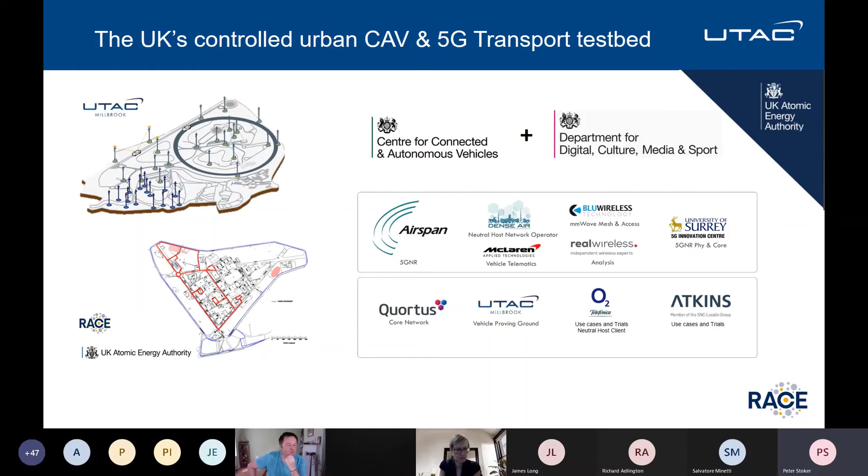If I move on to next slide. So this is an overview of our connectivity that we have at the UTAC Millbrook location. So for those interested in connectivity, devices, services, etc., we have around 59 masts with around 100 base stations. We operate private networks in 4G and 5G standalone, in millimeter wave, in DSRC. We have high definition CCTV, lots of fibre and power, and very accurate locations, object to object, anywhere on the site. So it's a very highly intensive, hyperdense, small cell network.

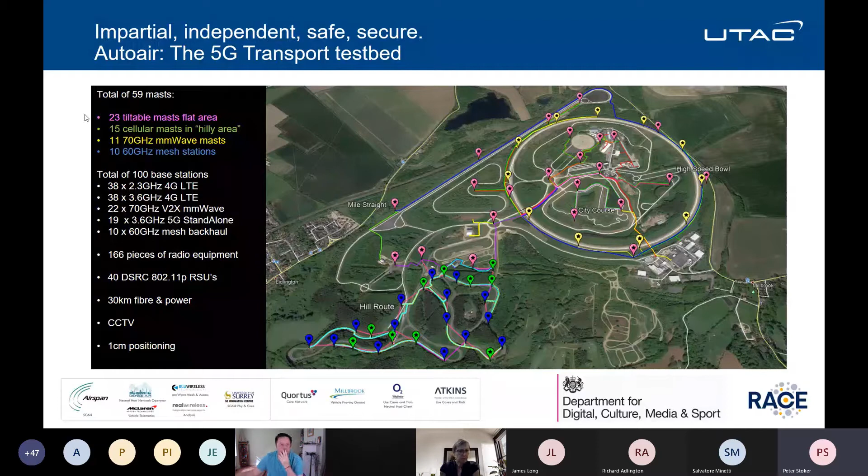You have your own SIM cards, so you can come along and test, and as we say, fail in private. The ability of a private network is we can turn it on and off, up and down, and so on. The Culham location, which is located just by Abingdon in Oxfordshire, is the home of the UK Atomic Energy Authority. They have a division called RACE, which is Remote Applications in Challenging Environments. And so RACE are interested in robots, well, autonomous vehicles and challenging environments, the public roads, hence the idea for the collaboration. But also we have access between us to the 200-acre site that's located at Culham with its roads and everything else I'll come to.

So the original proposition of our joint project was to offer test services to the industry, including new facilities, a simulation suite. What was innovative, it's a clear pathway to on-road operation, as we just heard from James. It's open to everybody. And because we're independent and impartial, we're not a threat to customers' IP or any compromise on that. We test vehicles, components, systems, and now services. We have lots of space, lots of tracks, and lots of endless scenarios and use cases. And we're open to startups, SMEs, OEMs and consortia. And indeed, from the last SME program you saw on the video, we had quite a few of that cohort actually testing with us in both locations.

What have we been up to? We've been doing a lot of work in terms of networks. We've been neutral hosting. We've been sending a lot of high-speed data backwards and forwards and overloading cellular networks. We've run some really interesting use cases in healthcare, in high-speed rail. We do live data broadcasts between vehicles. We do video calls at 100 miles an hour and remote vehicle driving. The sort of high-speed data we can pursue is around about 1.6 to 3 gigabits per second at 160 miles an hour, which is a high-speed rail use case. We're doing lots of work on CAV testing for AI development in ADAS, in safety drivers, different vehicle types. And we've seen lots of different people, startups, SMEs, OEMs, mobile operators, infrastructure providers, regulators, drones, and even local authorities.

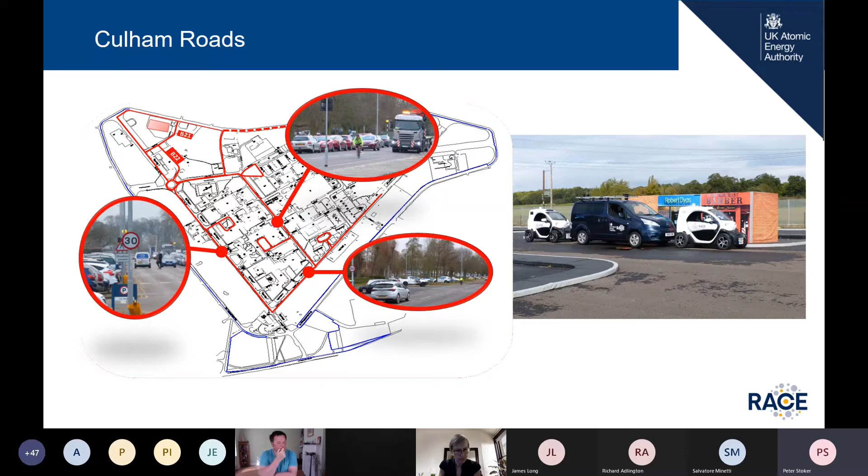So more a semi-controlled site, but with people and vehicles and obstacles and road features. So here you can see a lot of signage, a lot of different vehicle types. We have a lot of junction types as well, and very flexible facilities that we can recreate road environments with sort of temporary paving and curbs and things like this.

Active safety. If you're working in this area, we have targets available. So we have cyclists, motorcyclists, pedestrians. We've got road signs, street lights, very accurate positioning, and a lot of good high-speed multi-channel data logging as well if you're dealing in this area. And particularly with signs, we don't just show nice clear road signs, obstructed signs, illegible signs, spoofed signs, whatever we need to do.

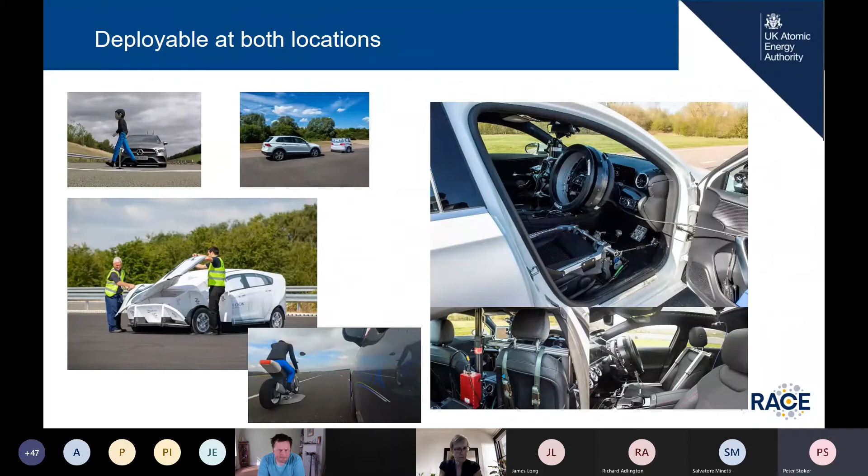And also lots of different vehicles. Again, if you're working in collision or you're working in collision protection or AI, then we do offer the ability to look at robot controlled vehicles as well as steering and pedal robots to operate your vehicle under test.

As well as a physical environment, we have a virtual environment. We have a very accurate digital environment at Millbrook tracks, resolutions around 1 millimeter in Z. And on the bottom there, you can see left is virtual, right hand is real. So we have most of our tracks covered. We have a driver in the loop simulator. We have a vehicle in the loop simulator as well.

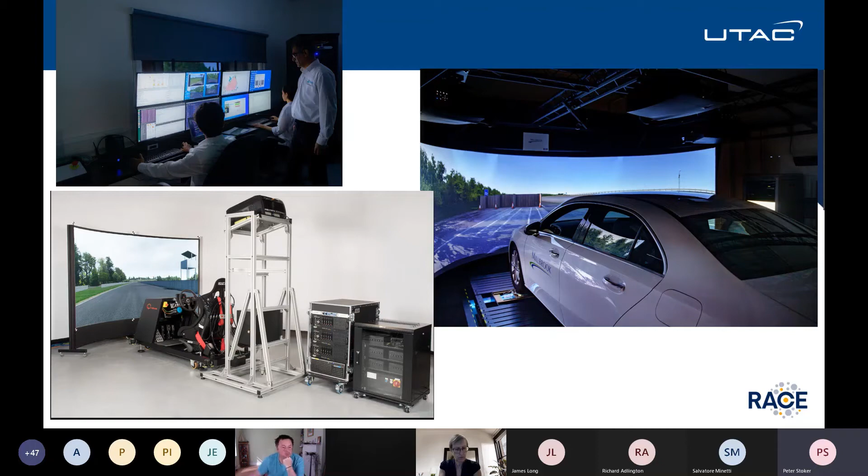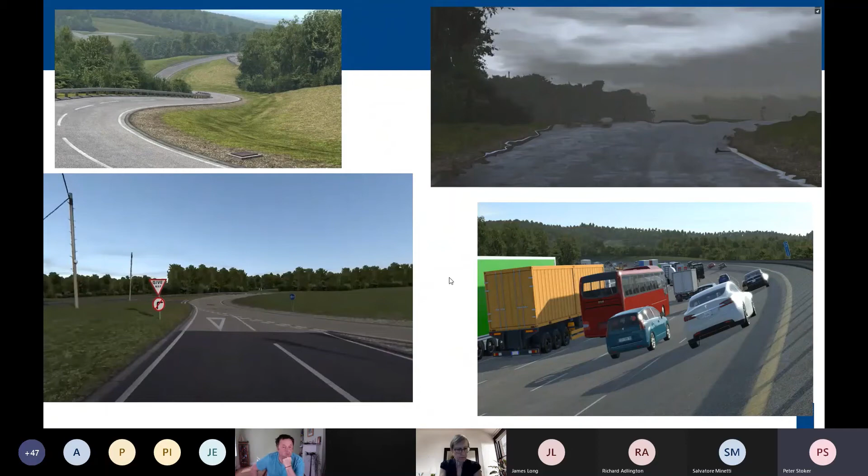We can show vehicles the tracks themselves, give them data from radar, LiDAR, camera, etc. And again, we can cover different weather types, different traffic types, and all kinds of different simulated scenarios, because actually nobody generally gets hurt in the simulator. At Culham, we have a digital model of Culham that's available to use, and also LiDAR scans, real and virtual.

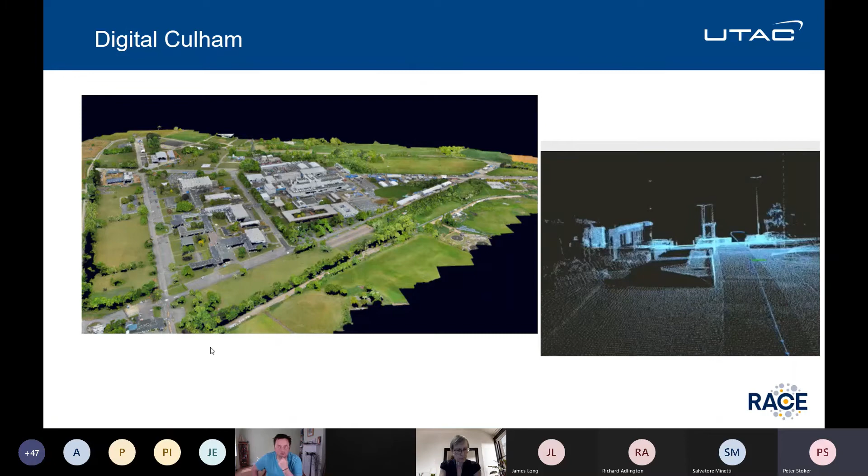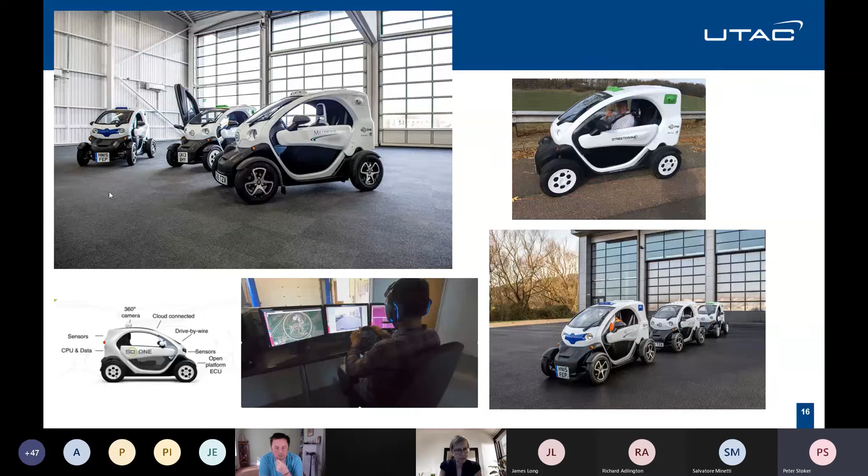If you need a vehicle, like James, we have some open source vehicles. Just remove that lobby sticker, which are provided by StreetDrone. So we have 3, so you can platoon, you can orchestrate, you can do all kinds of different things with it. The guy in the bottom middle picture is actually remote vehicle operating. So he's driving a vehicle from inside the garage out on our tracks using our network with high bandwidth and low latency, and again, under complete control.

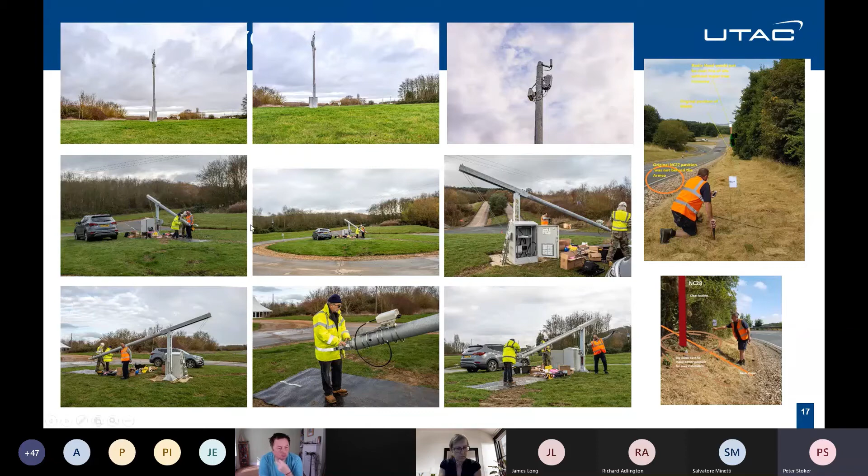If you have devices, then we have a range of masts that we can deploy these on. These are tiltable, so you don't necessarily need working at height permits to do this. So we can add on devices and services and link them into our fiber and power network if we need to do that. So these are the 4G 5G small cells located around Millbrook. At Culham, we have the same type of connectivity and CCTV. So we cover the site at Culham, and again, the same ability to tilt down and attach your own devices if you need to.

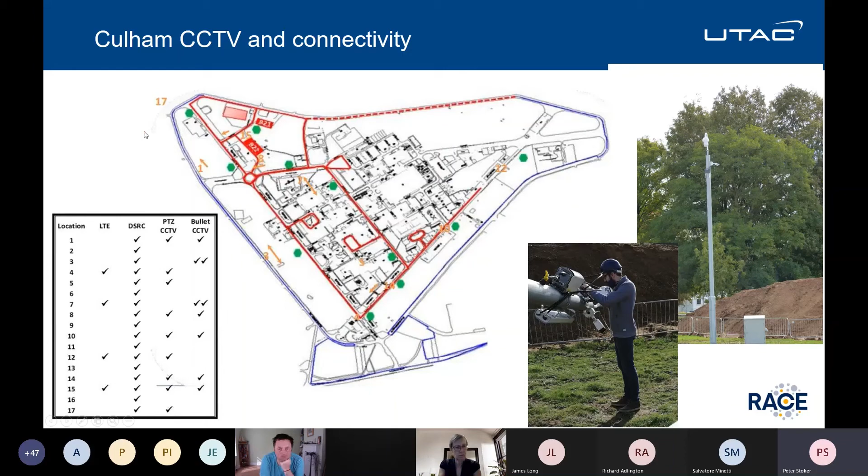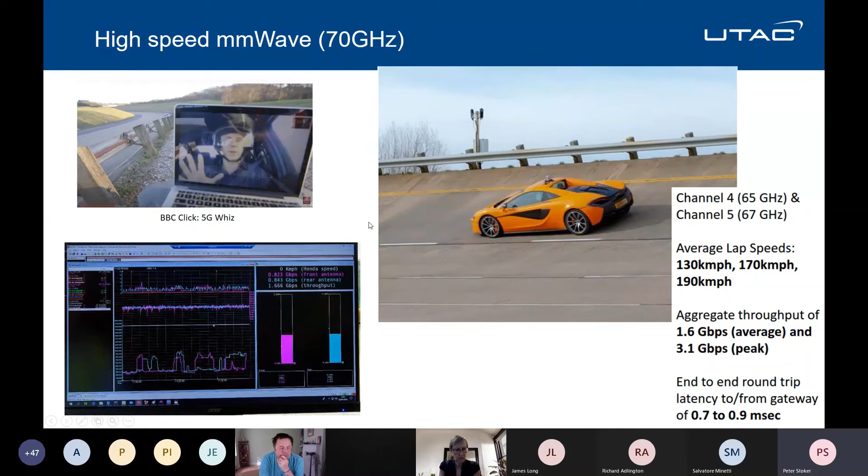We have high bandwidth, high speed, low latency communications. This is a use case for high speed rail using 70 gigahertz millimeter wave, and the vehicle itself is operating with a train antenna on the top. This is giving us aggregate throughputs of around 1.6 gigabits per second and peak up to about 3.1 gigabits with an end-to-end latency of less than 1 millisecond. So if you want to transmit high bandwidth, low latency data, this is the place to do this. It's actually a high-speed rail use case, not a McLaren 570S use case test.